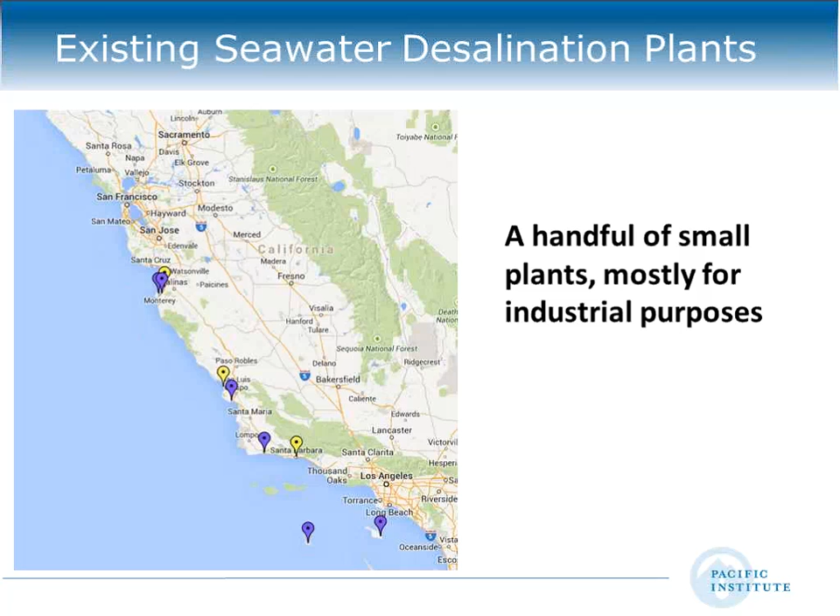In addition to these proposed plants, there's one very large plant under construction in Carlsbad, which is just north of San Diego, and that one would produce 50 million gallons per day. So it's a very large plant. It would be the largest seawater desalination plant in North America. So this gives you a general sense.

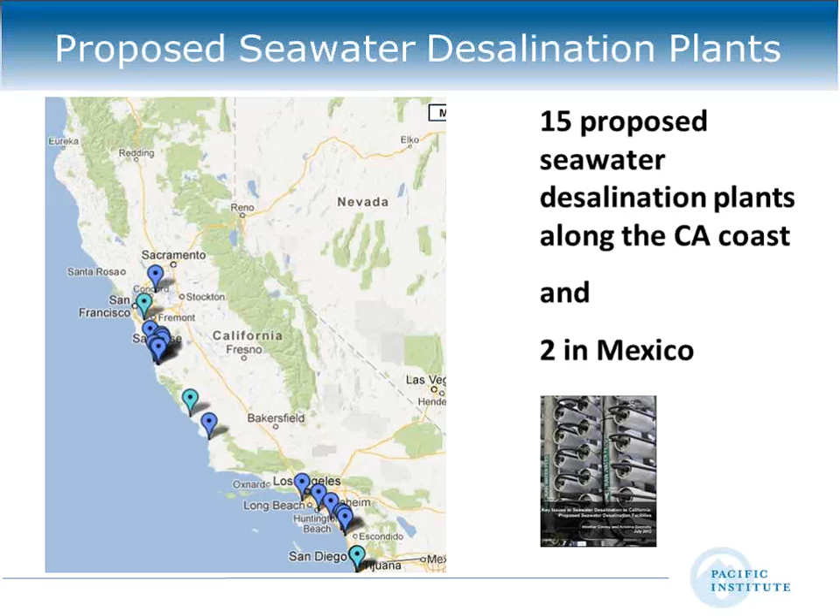These plants are at various levels of proposal. Some are more in the conceptual feasibility stage. Other ones are much further along and are seeking permits. They're going through either the Coastal Commission, in some cases the State Board. So we have an array. Many of these are not in response to the drought. In fact, these have been, in many cases, on the books for several years. And agencies are pursuing these, some more actively than others. So just to give you a sense of where we're at right now.

Why are these utilities, why are these agencies considering these plants? It's largely because of interest in improving water supply diversity and reliability. Seawater is a seemingly abundant supply of water just off our coast. Contrast that with the real constraints that we know we have in freshwater.

Seawater desalination is largely independent of weather conditions. So unlike with some of our freshwater, where we have more in wet years and less in dry years, seawater desalination can provide a very consistent, reliable supply of water. If you contrast that with our demands, our demands tend to be higher in our dry years and lesser in our wet years. And so there is this offset in traditional freshwater that doesn't exist in seawater desalination, and that can be very attractive depending on where your local supplies are sourced.

In addition, it provides source diversity. Many utilities in California, in fact the majority of utilities, are very much concerned with source diversity. They want to diversify the water supplies that they're currently using to buffer them and make them less vulnerable to constraints in any one of those supplies. And so, again, seawater desalination is very attractive in that sense.

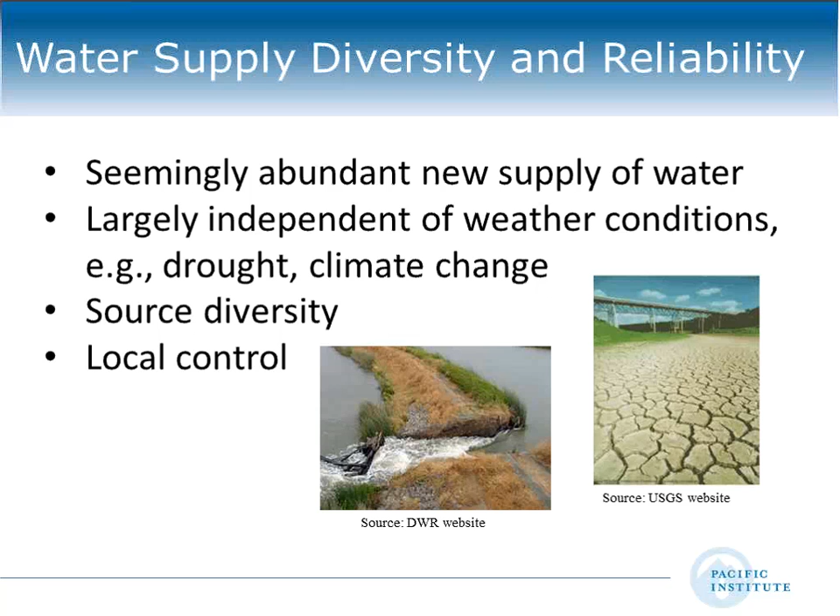Given the interest, there are a couple of key outstanding issues around seawater desalination. We've done some work going back to 2006 on the topic, trying to understand what the advantages and disadvantages are. In 2011, the Pacific Institute launched an initiative to get a better sense of what people thought were the key concerns or the key issues. We interviewed several dozen stakeholders, representing water agencies that were considering these plants, environmental groups, some supporting, some not supporting. We talked to state agency representatives and industry as well, to get a better sense of what they thought the key issues were. And there were three issues that rose to the top.

The first was the cost and financing of the project. Second was energy use and greenhouse gas emissions. And third were the marine impacts, specifically related to the intake of water from the ocean, but then also the brine that's produced along with the fresh water and the impacts that can have on the marine environment. So what I'm going to do in this talk is dive into each of these topics, first around cost and financing. And let me also note that there are reports on each of those key issues, so if you're interested, please do look at them on our website.

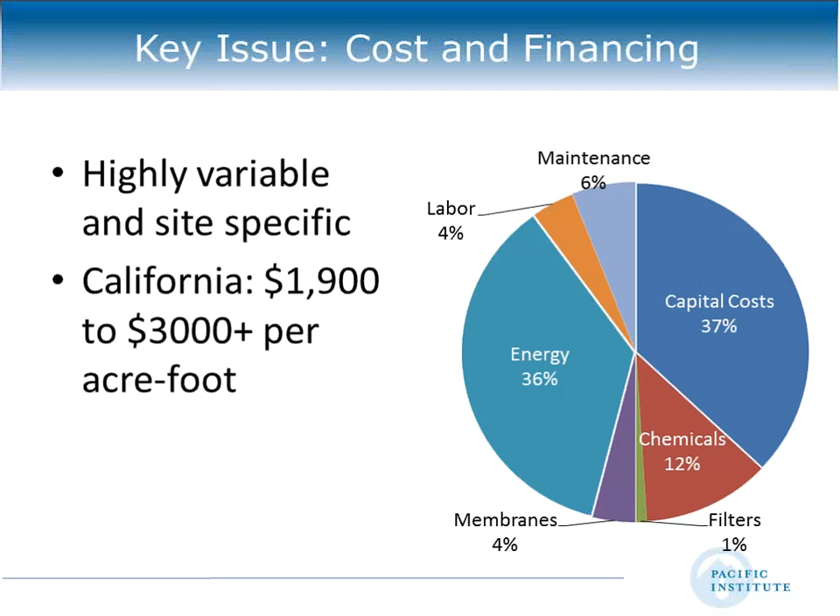In terms of financing, there have been a variety of financing methods either used or proposed for seawater desalination. The most common is around municipal bonds. These are either revenue or private activity bonds in the case of the Carlsbad plant. This is really the traditional way in many communities where we have funded and financed large infrastructure projects, although not exclusively. Some do a more pay-as-you-go. But municipal bonds look like that would be a common financing method for the proposed plant.

In addition, there has been both state and federal grant money that's been available for desalination. For example, for Prop 50, there was around $22 million that was put forth either for construction projects, pilots and demos, or in some cases feasibility studies. There is money in the bond that could be available for desalination. It's in a chapter where it's grouped with water recycling. Hard to necessarily say that money would be used for desalination, but there's some potential there as well.

In addition to grants, there have been some low-interest loans that have been made available for desalination, as evidenced in Prop 84. And finally, this is something we haven't seen a lot in the water sector, although it is coming to bear in Carlsbad, is private equity. So there has been some private equity investment for that particular plant. Hard to say whether or not that's the wave of the future. Probably not, given that many of these are going to be municipally owned and operated facilities, but it is something that we have seen recently.

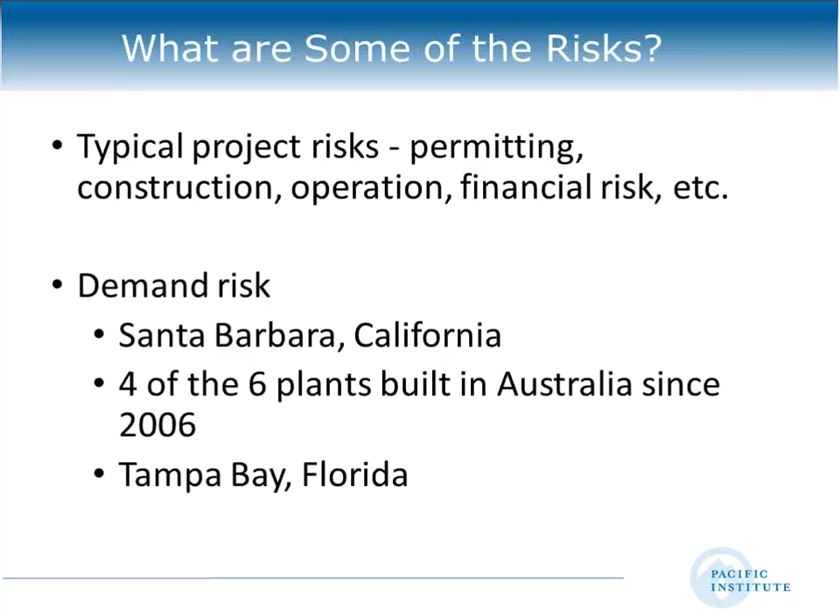They, too, decided to build a desalination plant. They, too, have lots of ocean available, and it was seen to be a supply that they could easily tap into. That plant had some issues with startup, construction, contracting issues. It eventually came into operation. However, they typically are operating that plant only at a quarter of capacity. Again, this is that issue where there were cheaper alternatives available, and they really wanted to develop those first.

So moving away from cost and financing, talking about issues around energy use and greenhouse gas emissions. Generally, seawater desalination is an energy-intensive process. Energy requirements vary, but looking at plants built over the last 10 years, which are using some of the best technologies, we're finding that they're generally using around 12,000 to 18,000 kilowatt hours per million gallons. About 2/3 of that energy use is associated with the actual desalting process. There are also energy requirements for the pretreatment, and for the post-treatment, and then also for intaking seawater from the

ocean. All of the plants being proposed in California are reverse osmosis plants. The general feeling is that there's been a lot of efficiency improvements in terms of energy use. Plants built today are using much less than they were 10, 15, 20 years ago. The general feeling is that we're probably at the best we can get. All of the plants are using energy recovery devices.

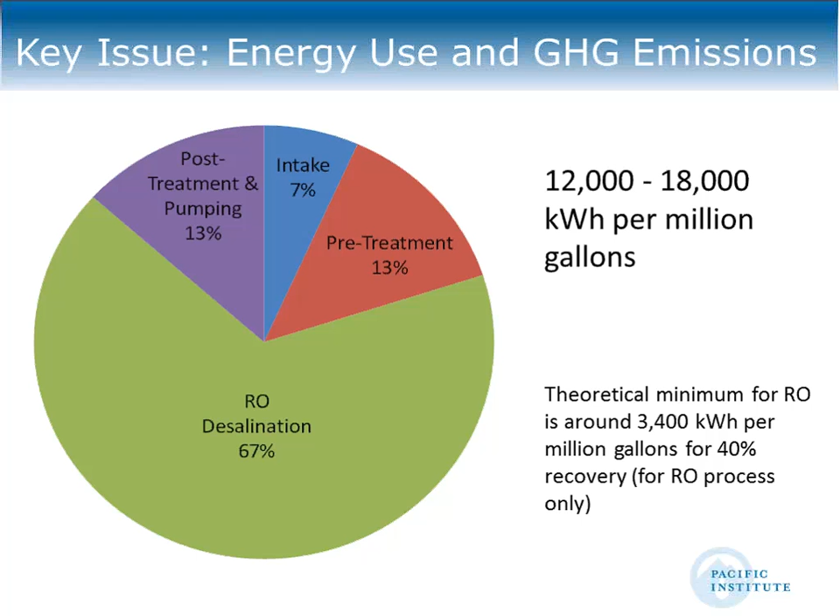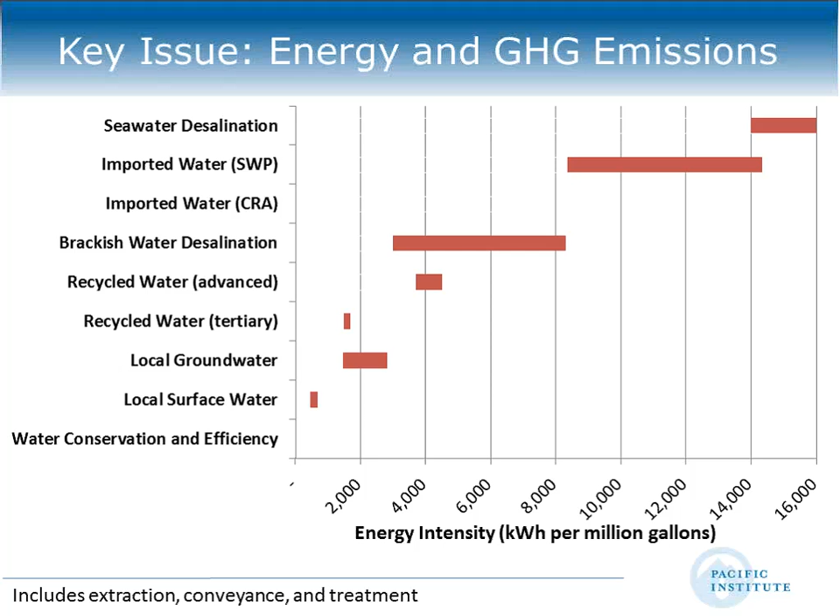What this shows and demonstrates is it certainly is energy intensive, and it's energy intensive relative to the options currently available. I will note, and there have been comments made, the numbers I'm showing here include extraction, conveyance, and treatment. I've had treatment in for all of the other ones. Oftentimes when people compare desalination with some of the others, they don't actually include treatment, so it's not really an apples-to-apples comparison. But I did sort of smooth that out, and so this looks at the whole big picture.

Issues around energy and greenhouse gas emissions. As I demonstrated, the total energy costs are high. They're high as a proportion of the cost of desalinated water, and that then leads to increased exposure to short-term and long-term energy price variability. So let's talk a little bit about that. First, around long-term energy price variability.

We know that energy prices are going up. CPUC estimates electricity prices will rise by nearly 27% from 2008 to 2020. This then means that the cost of desalination, again, it's an energy-intensive supply, could in fact go up. And in fact, if a plant is built and energy price goes up, the cost to then desalinate that water can go up. This, of course, is true for all water supply options, right? They're all using some amount of energy, but it impacts desalination more because it's more energy intensive, and it's a larger percentage of its total cost.

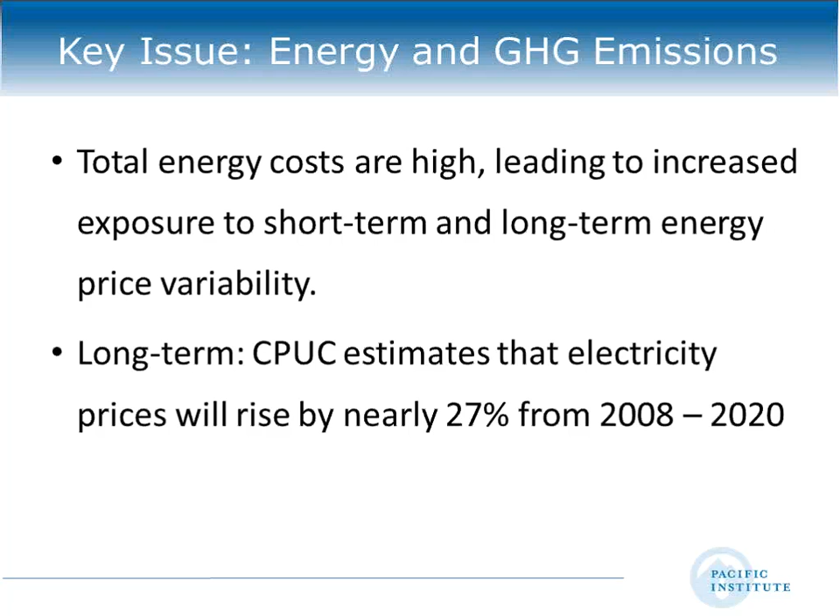So that looks at long-term variability, but seawater desalination is also vulnerable to short-term variability, and we can think about that now in the context of the drought. What we find is that precipitation affects the cost of electricity in California. Not surprising. We have a lot of hydropower, and when we have a drought like this year, hydropower production is lower. Hydropower tends to be relatively cheap compared to the other energy options, and so when that's not available, we then have to make it up through the more expensive options. So what we tend to see is energy prices going up. This just gives you a demonstration of that.

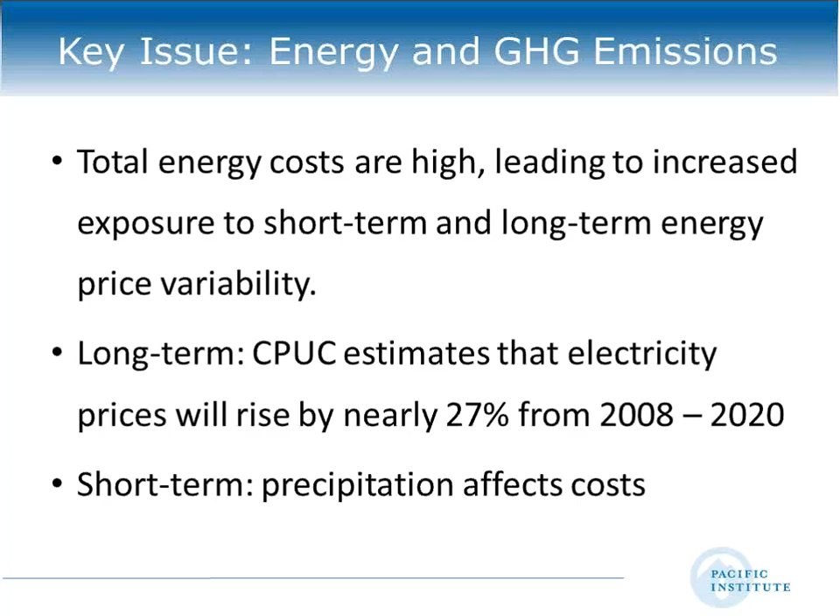So you might be thinking, why am I telling you this? What it means is if desalination is something we want to rely upon more during a drought, it suggests that the price of that would in fact be higher. And utilities that are considering ramping them up during these dry periods also need to be including that into their cost estimates. That so far is not typically done, but it's something we need to be doing going forward.

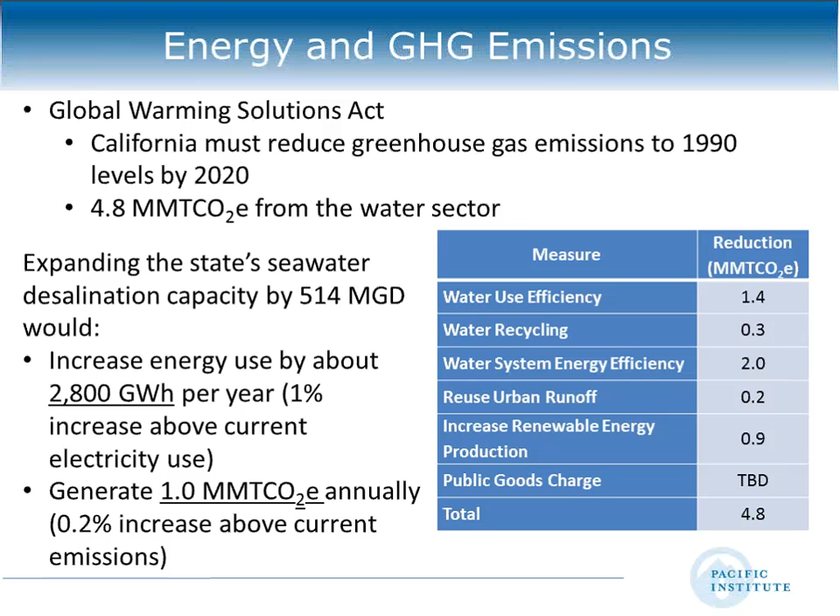And what the research suggests, if we look at these two, the higher permeability membranes and the more efficient pumps, is that there are some pretty modest improvements there. But really, if we want to look at revolutionizing, changing, greatly reducing energy use, we need to probably look at some of these alternative desalination technologies, in particular forward osmosis and membrane distillation.

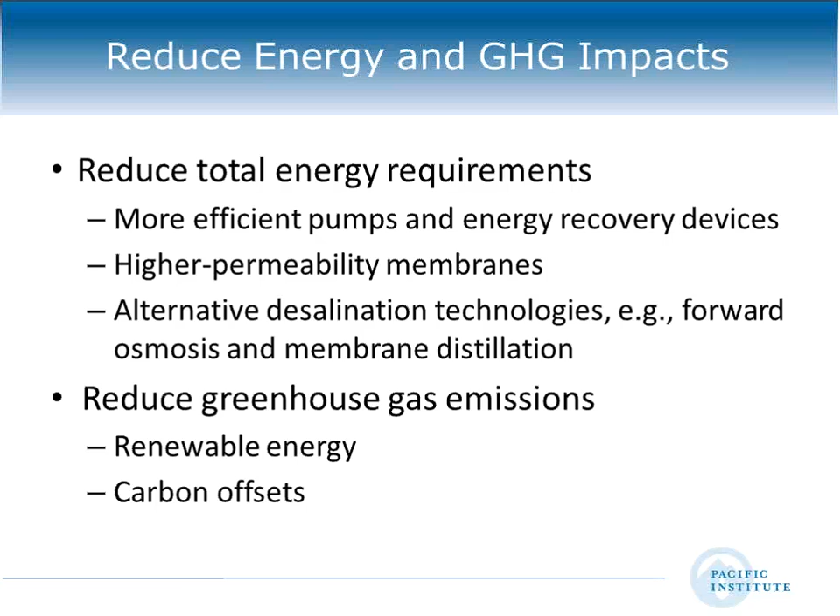Okay, so I want to sort of shift gears. I want to talk about the marine impacts, but I also want to step back and talk about some of the environmental considerations more broadly. Seawater desalination has the potential to provide some environmental benefits. There's potential to withdraw less water from rivers and streams, and to consider it a potential climate change adaptation. Remember, I mentioned that it was independent of weather.

So some have sort of thought of and think about seawater desalination within that context. On the issue of source displacement, or replacing a surface river or stream, there has been some concern that there's no real mechanism or legal mechanism in place to ensure that that water is actually used to restore a particular ecosystem.

Now, that's not the case in the Monterey area. In that case, there is a legal mechanism in place. In particular, the state board has required a reduction of withdrawals from the Carmel River, but that's very unique. That's not something you see in other parts of the state. So that's an issue that has been brought up, at least on the environmental benefit side.

Desalination also imposes some environmental risks. Again, some of these, construction, some of the potential development, these aren't unique to desalination at all. In fact, one could argue that they're issues associated really with any new water infrastructure supply project. But there are some that are unique to desalination, and those are related to greenhouse gas emissions, which I already talked about, and also to the marine impacts, specifically related to intakes and brine discharge.

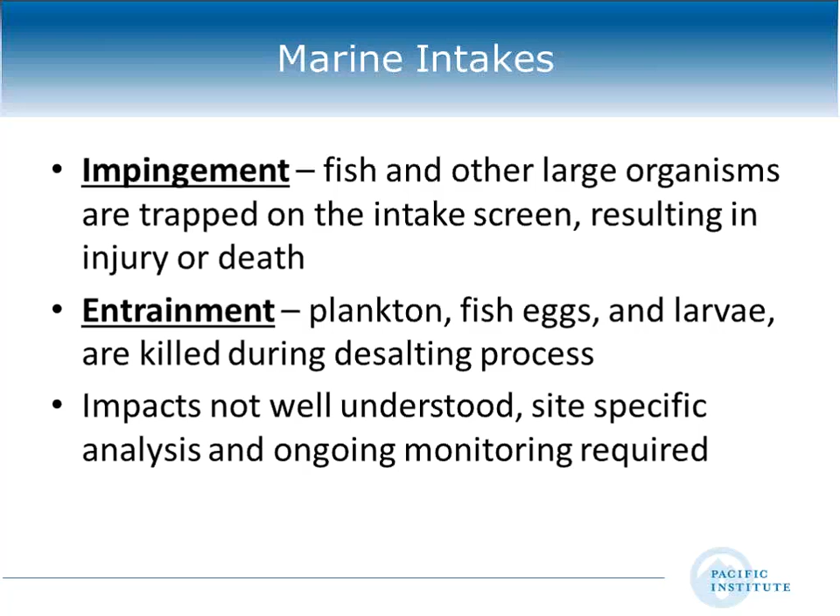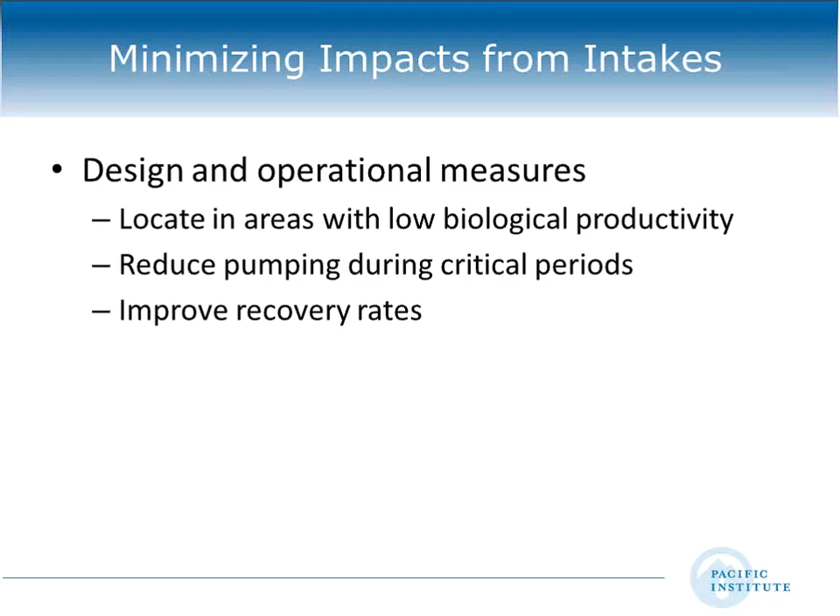There's several ways we can minimize the impacts from intakes. One is design and operational measures, perhaps locating in areas with low biological productivity, improving the recovery rate so you're actually not withdrawing as much water, and reducing pumping during critical periods for some of the species that might be impacted. But in addition, there are some technological measures that can be implemented.

Most seawater desalination plants are using surface intakes. So that means it's sort of a pipe. There are, of course, screens on this pipe, and they are just directly withdrawing water from the ocean or from an estuary. There are behavioral deterrents that have been employed in some cases, strobe lights, air bubble curtains. Some of these have questionable success rates, a little bit debatable. A more common approach has been physical barriers, so screens on the intakes to try to reduce or minimize impingement and entrainment.

But in addition, what we've seen is a shift towards subsurface intakes. So these are intakes that are located essentially beneath the ocean floor. They are able to use the sand as sort of a natural filter. It helps them reduce or eliminate impingement and entrainment. It can help reduce some of the pretreatment costs and therefore the total cost of desalination.

However, there are some potential limitations. One is the cost tends to be more expensive than surface intakes. It can't necessarily be built in all areas. There are some limits on the sediment for which that technology could be used. But we have seen some newer technologies developed in recent years, such as directional drilling.

So finally, around brine. So what is brine? As I mentioned earlier, they're taking in 2 gallons for every gallon of fresh water produced. That means they're also producing a gallon of brine that's twice as salty as the seawater. Typically, that brine not only contains salts, it contains some of the natural seawater constituents, things you naturally find in the ocean. It can also contain some of the chemical additives that are used in the desalination process and can, in some cases, have some heavy metals from the desalinating equipment, from the intakes, for example.

Typically, that brine is simply discharged into the ocean or into an estuary. Brine, because it's so saline, tends to be very dense. So when it's released, it tends to sink down to the bottom, where it can then accumulate and pose impacts, at least locally, on some of the species that live there.

And studies on brine, and this is a quote from a recent review of all the brine studies that have been located around the world, are extremely limited, often not peer-reviewed, not readily available, or have flaws in the study design. Part of the issue is that there hasn't really been monitoring before the plants were built, so it's really hard to say what the impacts were. So they've tried to do some other types of analyses, but again, we really don't know what the impacts are. We certainly don't know what they are necessarily going to be for California either.

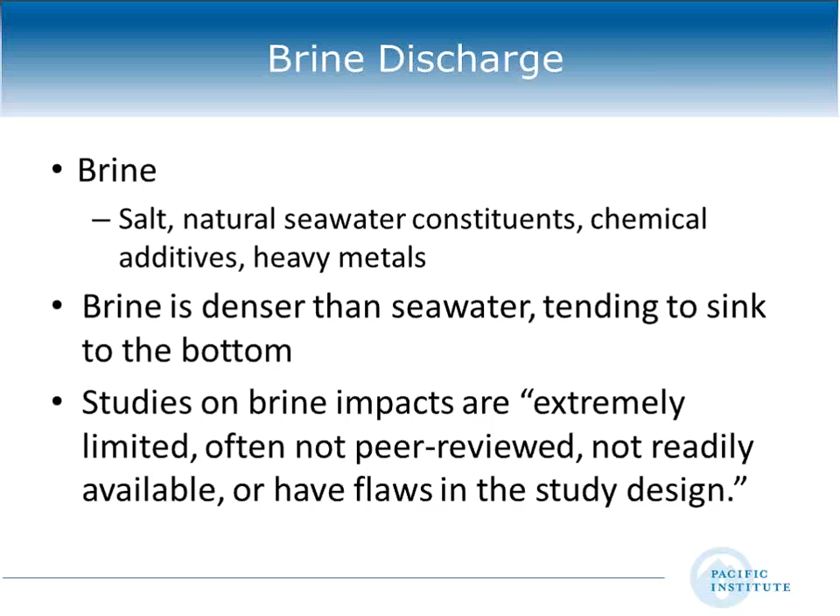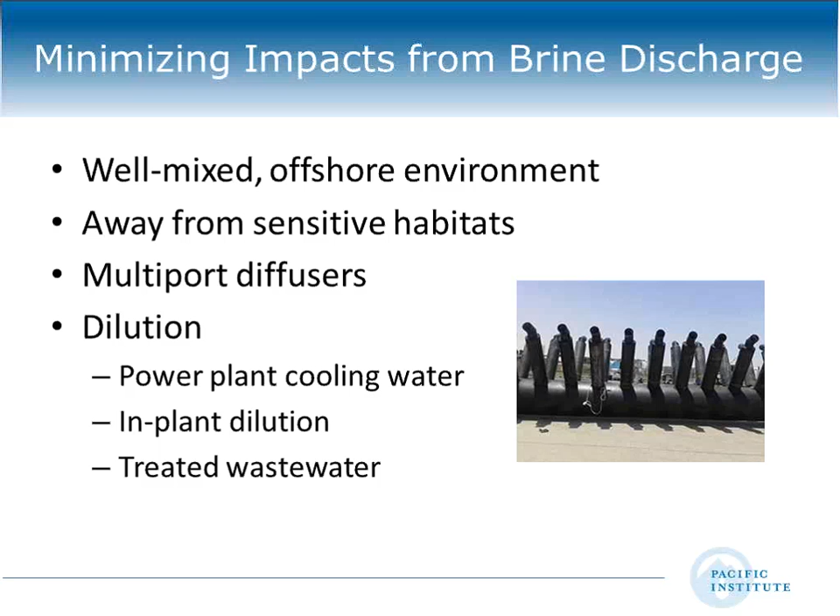And treated wastewater, certainly that's a way to take care of the salinity issue. You have a fresh water mixed with a more saline, you can more easily match background. It does, though, raise questions around whether or not that treated wastewater could have been used for recycled water, for example. There are also concerns around the nutrients that are within wastewater and whether you're then introducing that into the lower parts or to the ocean floor and some of the potential impacts there.

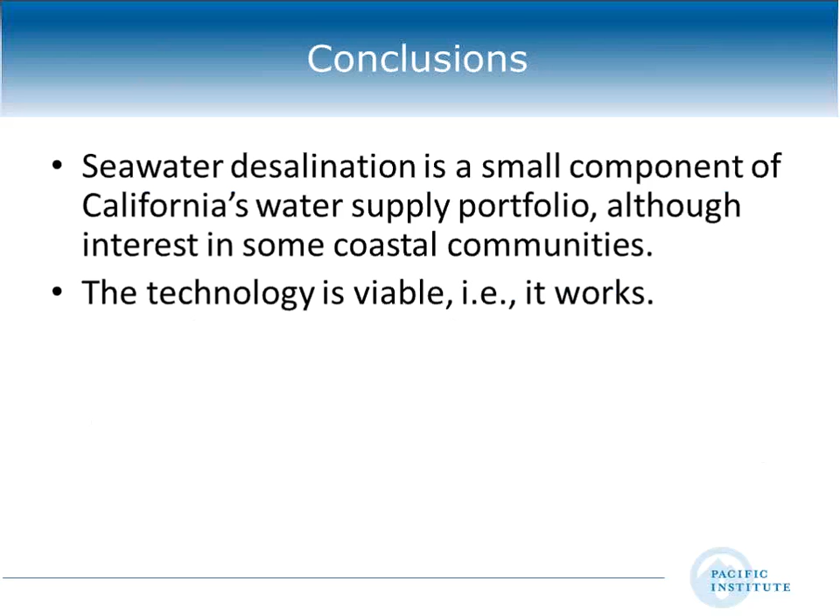So moving on to conclusions, first is that currently seawater desalination is a relatively small component of California's water supply portfolio, although there is interest in coastal communities, and in some cases a very intense interest in developing this technology. The technology is viable. We know it works. It's been done in different places around the world. The issues, though, are not necessarily technological issues. The key issues are its relatively high cost, its energy intensity and associated greenhouse gas emissions, and impacts on the marine environment.

All of these, though, one could argue there are impacts essentially associated with anything. And so we need to stop looking at seawater desalination in an isolated manner. We need to look at it as it compares to some of the other options available, the other options for local supplies, new supplies, and then efficiency options.